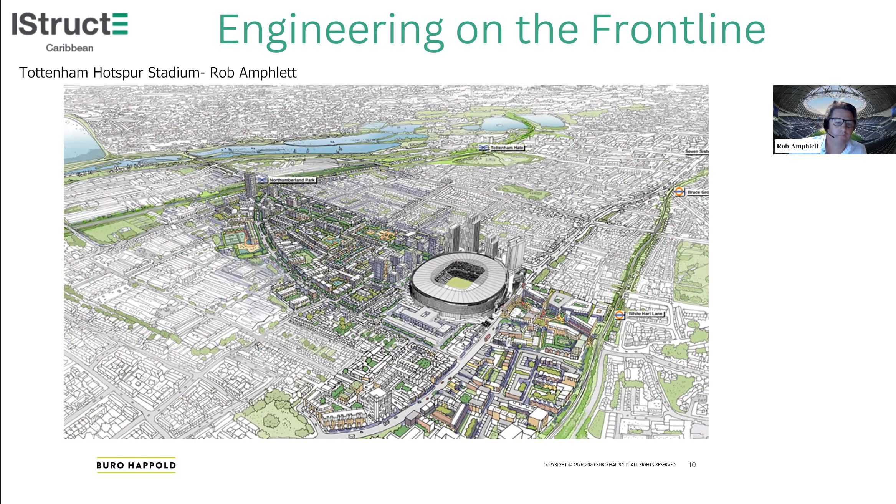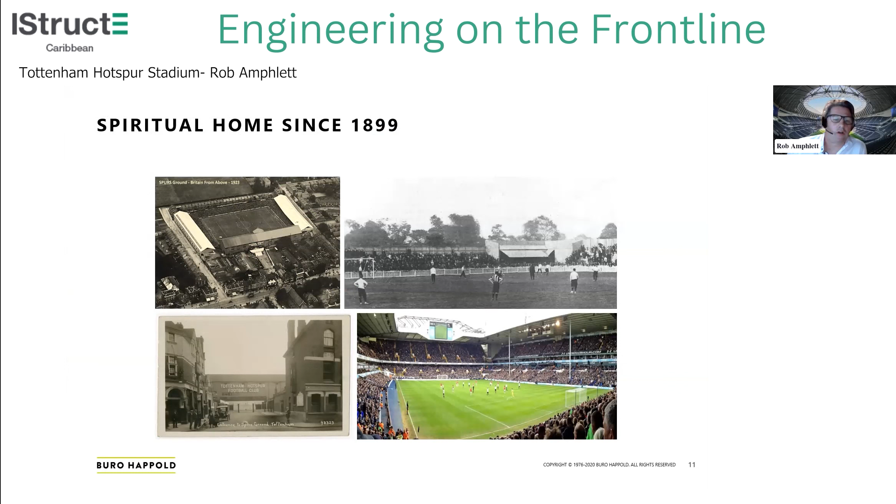So this area of Tottenham is known as White Hart Lane, and it's been the spiritual home for the club for over 100 years. This drove a really strong desire from the club to stay at White Hart Lane and to be away from home for as little time as possible. So what this meant is a key driver to the design was phasing. A strategy to keep the club playing at White Hart Lane for as long as possible. And what you've got on the screen now is the footprint of the old stadium in blue over the new one.

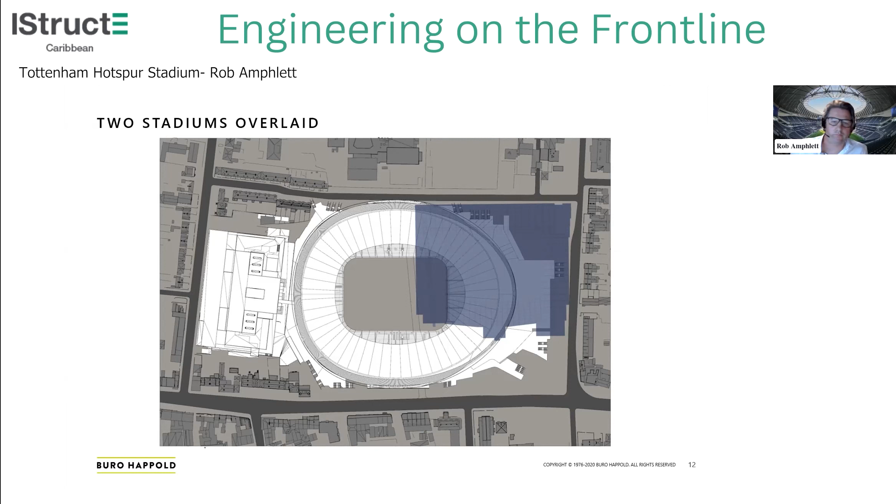And here you go, the comparison of size. So the number one there is the old White Hart Lane. Number two is the new Tottenham Stadium. And this is why we're doing it: increasing capacity, increasing revenue for the club. But also note how compact it is compared to Wembley.

So Wembley has 90,000 seats, and Tottenham 62,000. Okay, so there's more seats at Wembley, but look how much closer we are to the pitch.

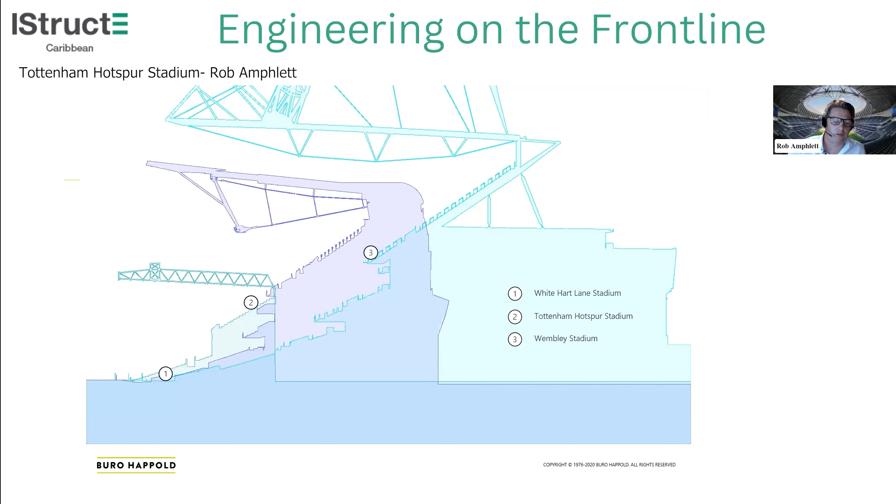And the stadium was fully operational. So we really did go for it on the phasing. This is one of the cores being built through the top corner of the old stadium. So desperate were the club and the fans to stay at White Hart Lane right to the bitter end.

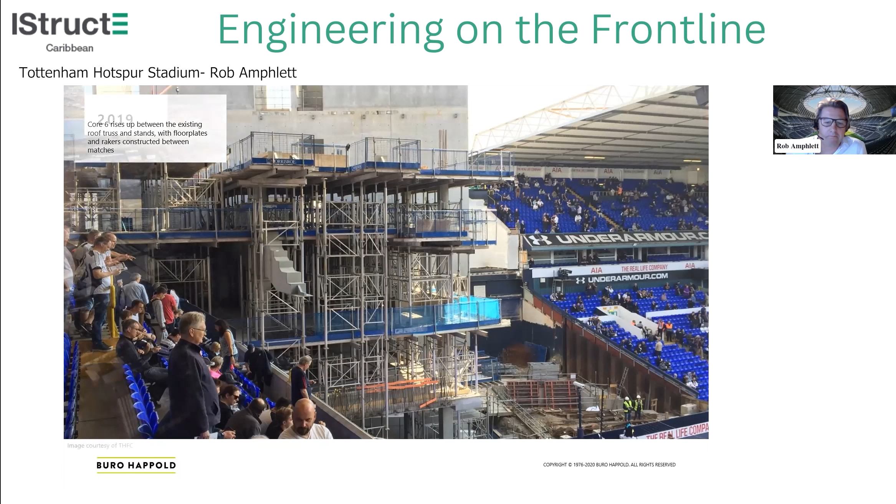But how do you get to Tottenham? There's a very dated transport infrastructure around Tottenham. For those of you in the room who don't know where Tottenham is, here you go. So London in the UK, North London, and they're the transport links that link into this area.

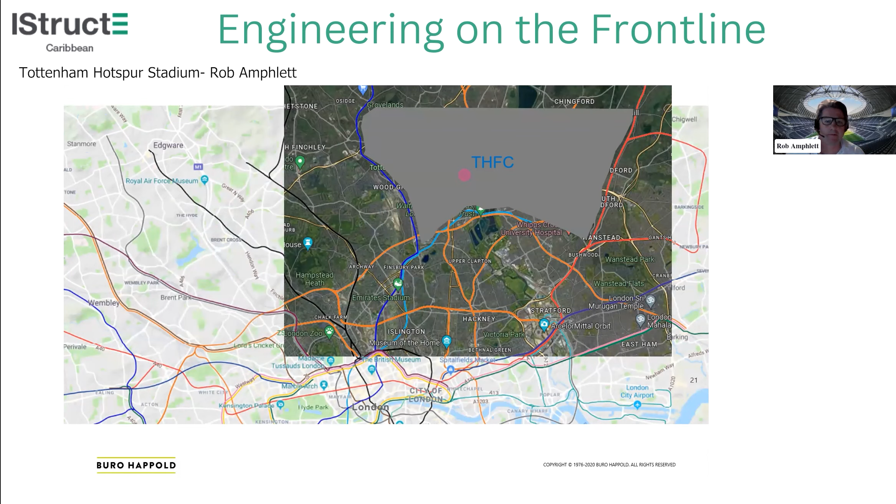And here it is in relation to the underground rail links. One of the key things is the stadium's in a bit of a transport shadow, so it's not easy to get to, and that's why it's one of the more deprived areas of London. And again, this drove some of the key drivers for the project.

Why should people come out to a new, bigger stadium? You saw how much bigger the new stadium was, and this was a key challenge for the whole project. And the answer from the club and the chairman Daniel Levy was simply, it just had to be the best. Build it and they will come. And that's hopefully what I'm going to show you.

So, having spent over 10 years of my life working on this project, I could talk about it for hours, but in the time we've got, I'm just going to focus on three key aspects, which will hopefully give you an insight into the design that we created and the value we can create as engineers.

If we just pause momentarily to consider what we mean by value. This presentation is based partly on a paper I wrote for the IStructE, which was about the value of engineering. So if we define value as benefits minus costs, and engineering has a lot to do with minimizing costs or minimizing material or minimizing carbon. If we can do that while we're helping to create benefits, we can see how as engineers we can create value.

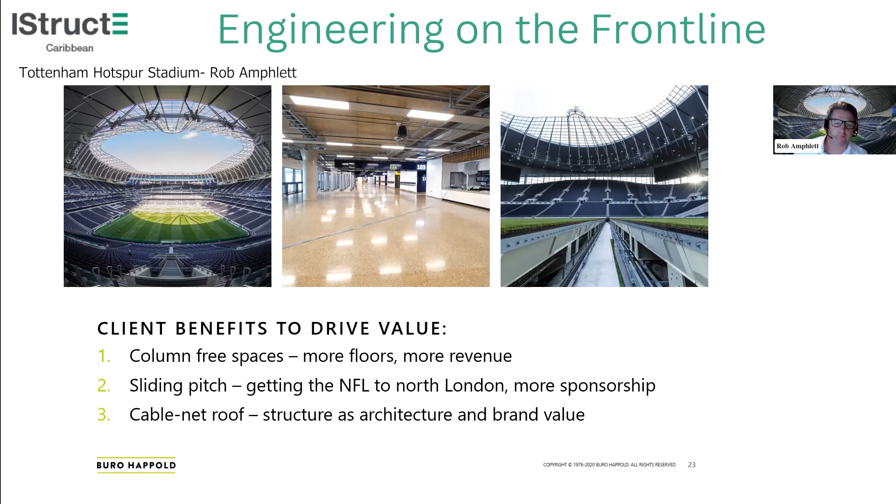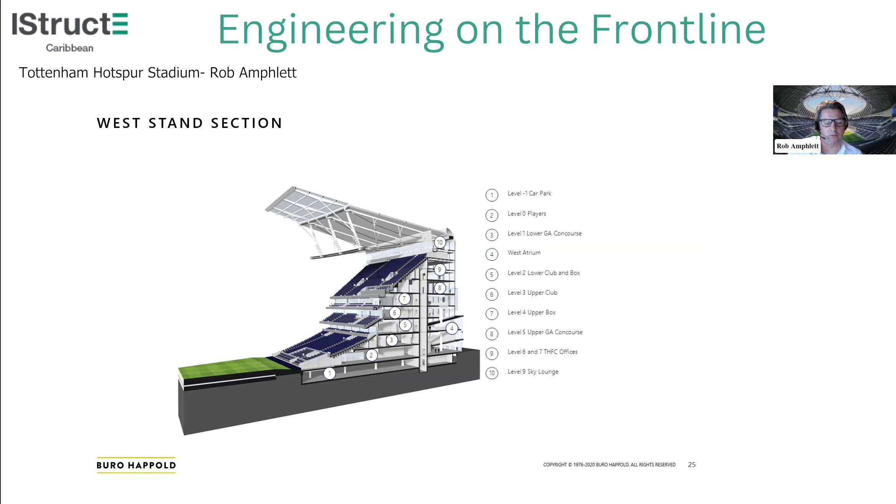And the key thing there was around quality. It's about making the spaces as good as they can be. The concourses drive the revenue. That's where people spend the money, and this was all about being the best.

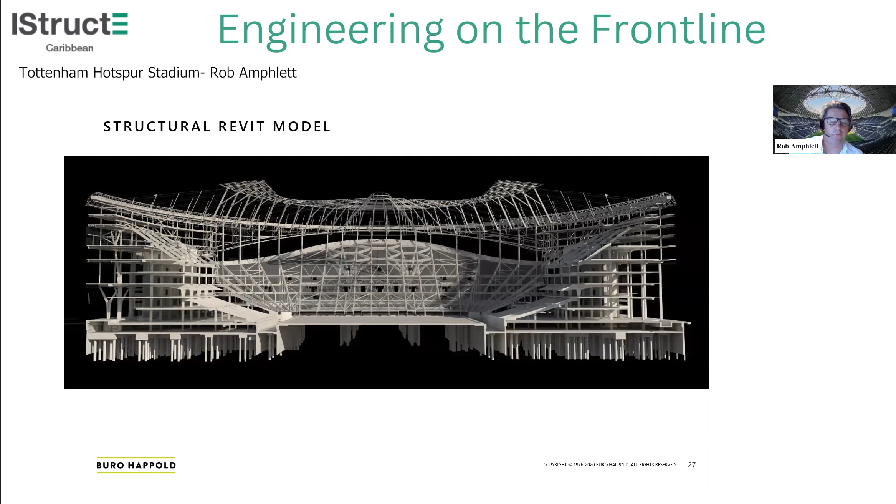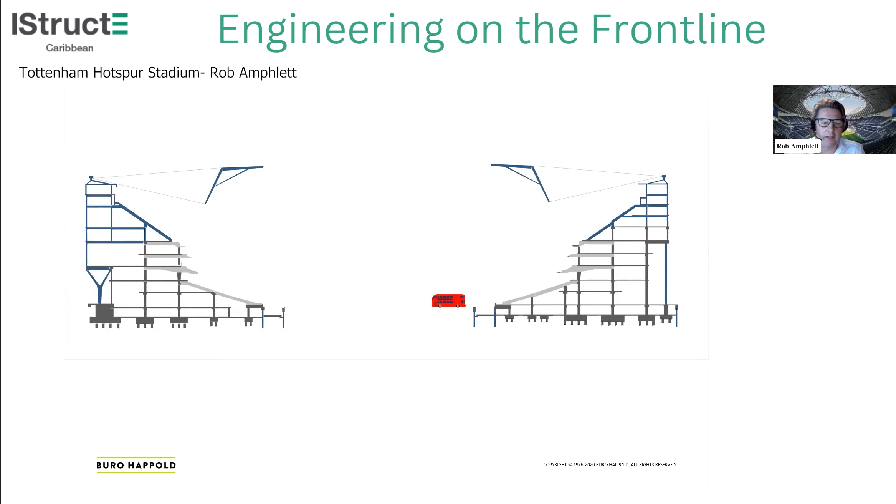And there's a London bus, just to give you some concept of scale. They don't actually drive the buses on the pitch. I'm not sure Daniel Levy would be very happy about that.

And here we are in plan. So to the south, and we'll come on to the south stand in a bit more detail in a bit, it was steel, and to the north, concrete generally. The dark grey long shapes there are the stability cores. So each stability core stabilizing independent parts of the concrete frame.

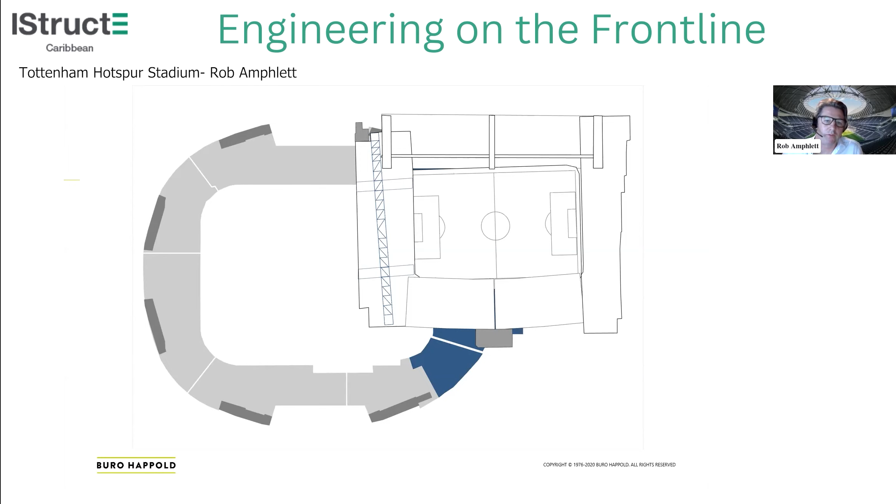And a key reason for this is because we were building around the old stadium. So in that second phase of build, doing it in steel obviously meant we could get it up quicker, or that was the theory. And you can see, you can't see one of the cores anymore. So that was the one that we were building in that corner. And that gave us the phasing line. So yeah, we're going to zoom into that red area in a second.

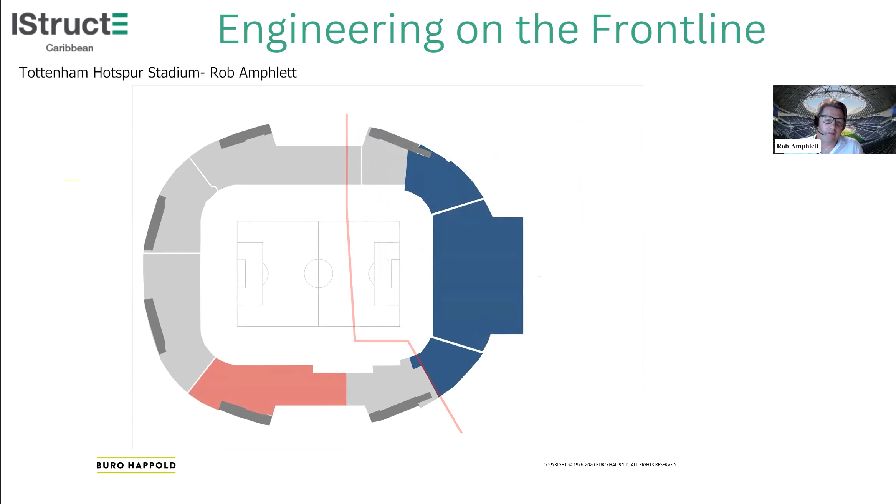But again, just another story from the chairman, Daniel Levy. So this is the training ground at Tottenham. In the restaurant in this facility, there's a column right in the middle of the restaurant, and Daniel absolutely hates it. So one of his key challenges was, I don't want any columns in the building, which obviously we couldn't do, but we did do our best to minimise it.

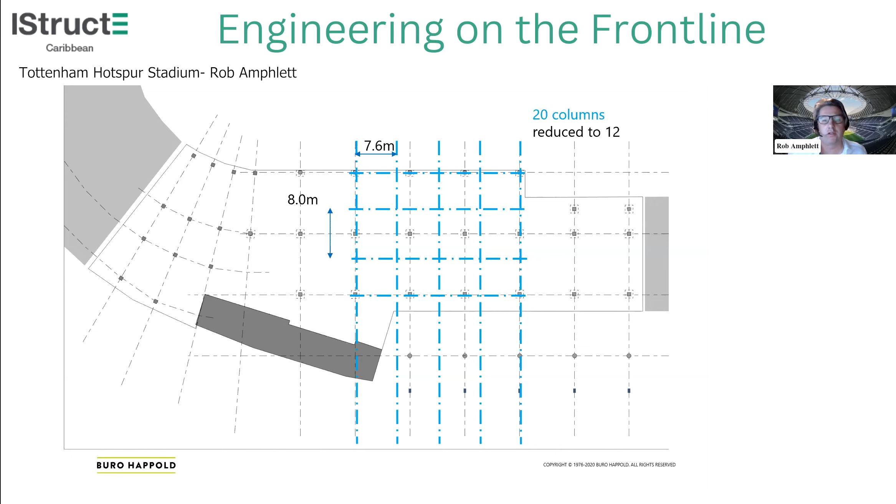So the blue is the original structural grid that we came up with. 7.6 by 8. 7.6 is pretty typical for a stadium. That fits with a normal box width. But here we wanted to push things further. So pushing it out to that wider grid, and we reduced from 20 columns to just 12 in that bay area. So pushing the grid to 10.1 crossways and 11.6 approximately the other way. What that 10.1 did as well meant that we could have bigger, more spacious boxes again, generating higher revenues.

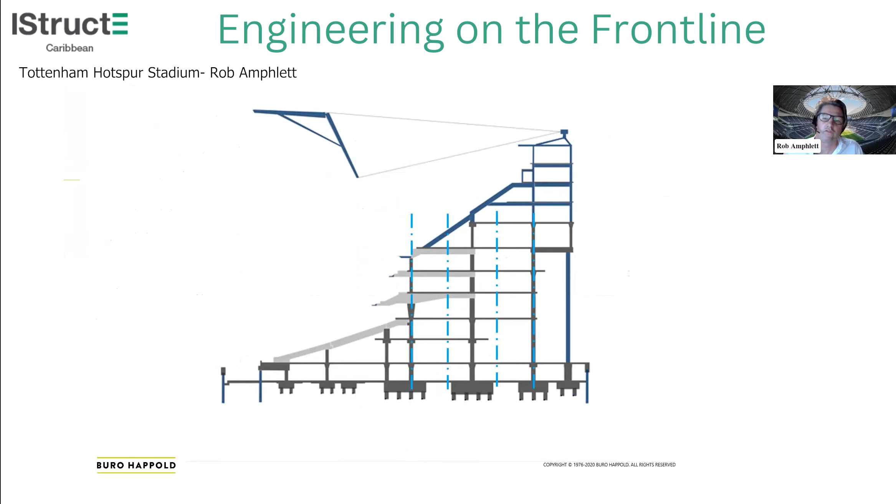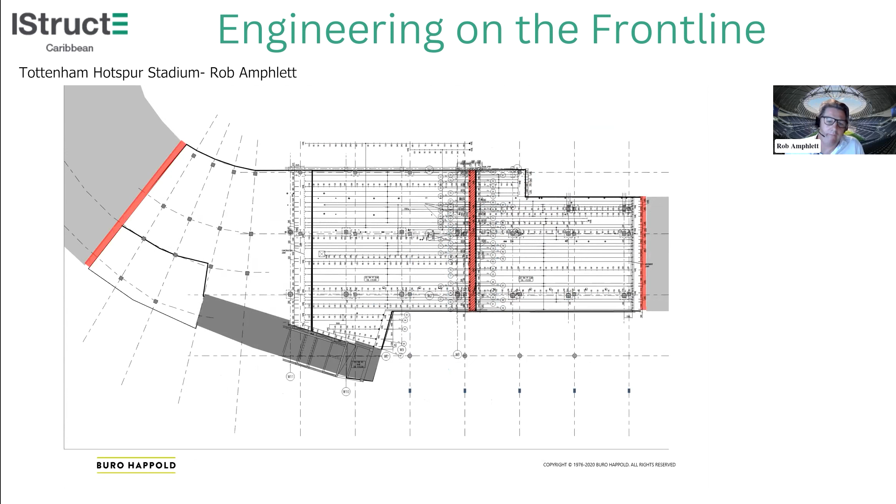I think in America they use unbonded more, and I'm assuming that might be what you use in the Caribbean, or maybe you don't use post tension at all because of the environment. And with thinner slabs, you get some dynamics issues as well. So a lot of dynamics that you have to deal with.

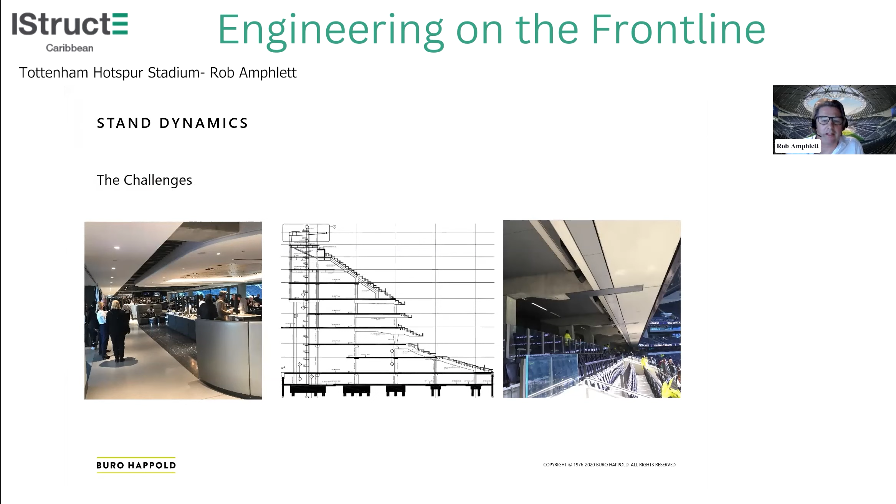But in a football stadium or a bowl structure stadium, the bigger issue is actually the seating bowl and the crowd dynamics. So again, trying to maximise the space for hospitality, we will push really hard on some of these cantilevers. Like I say, to maximise the spaces and minimise material. So this meant we had to come up with a completely bespoke approach to dynamics. It didn't work with just the standard guidance that we get for sports stadia. So we had to look at loading the tiers differently.

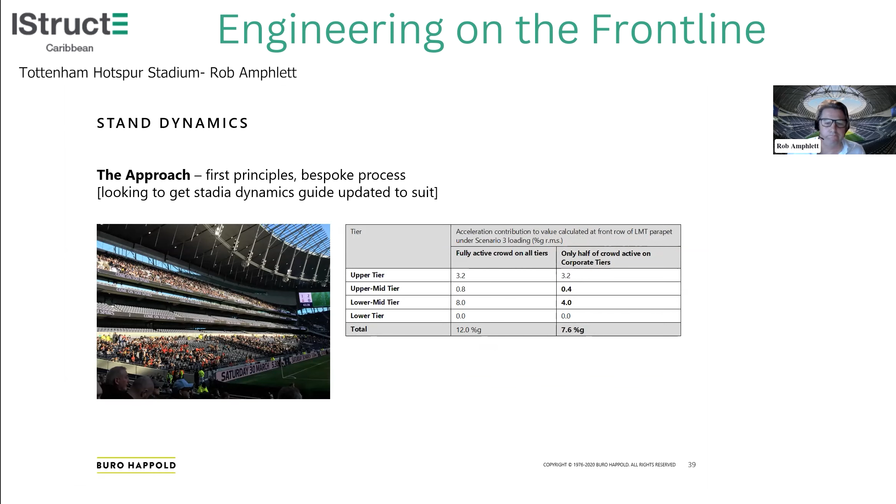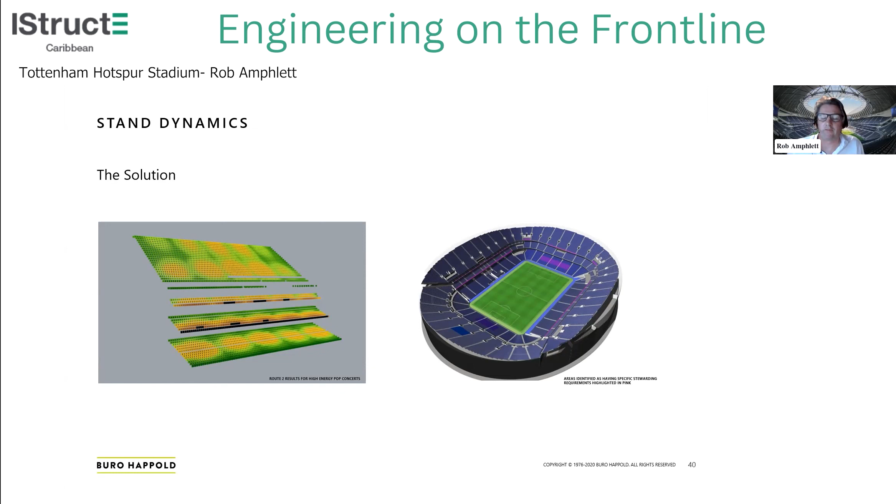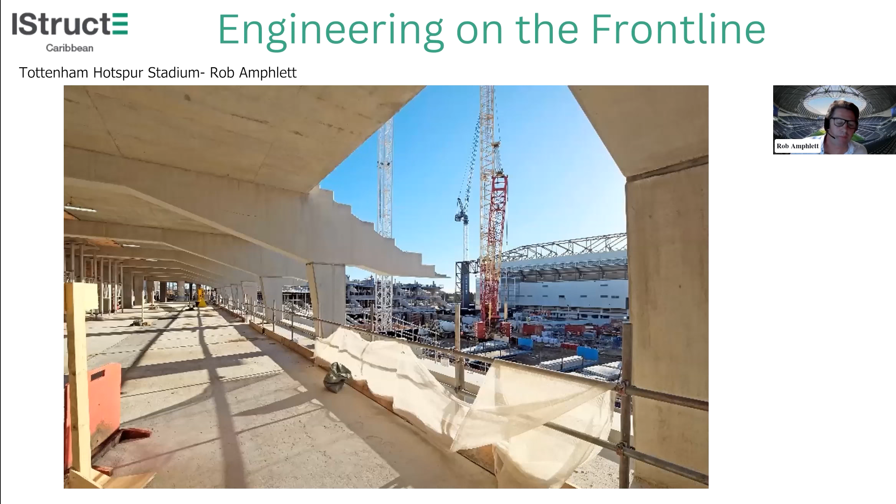So we did get our frame built and our cantilevers built and got them approved by building control, and the club did get their extra space. And we also managed to do a bit more to reduce our carbon, bearing in mind this was back in 2015 when we were digging this hole, and we weren't yet fully targeting embodied carbon.

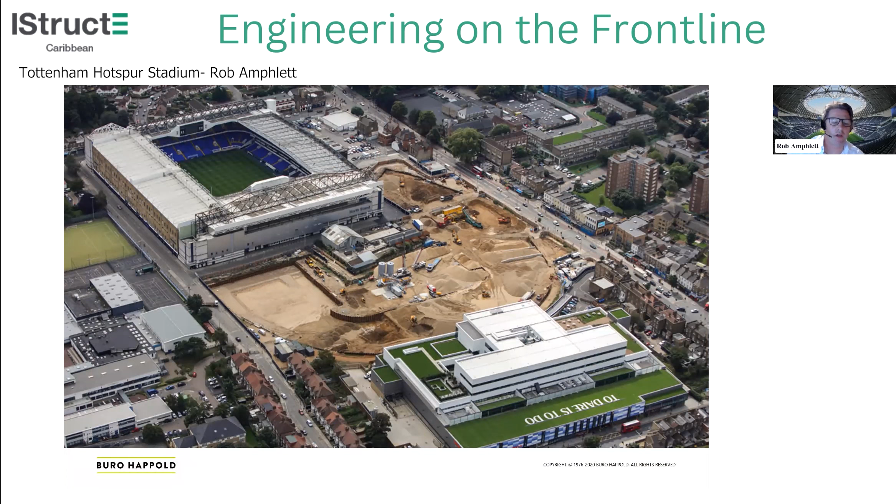So I can't take the credit for this, but my geotechnical team spotted this opportunity. What they noticed was, as we were excavating the material, that it looked ideal for making concrete. Oh, wrong way.

So that's what we did. We started sorting it and washing it, all that as dug material. Got some good grading out of it. We had to import a little bit to turn it into concrete. We had a batching plant on site, and through that we managed to save a lot of carbon, a lot of cost, and a lot of heavy truck movements.

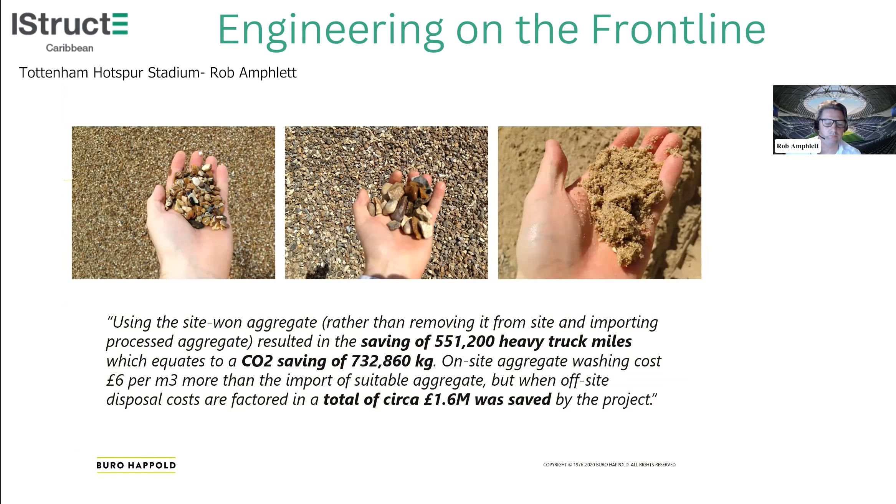polished. And what that did is it saved a lot of weight, because we then didn't have to put screeds in and finishes over the top. So it's much more robust. Some of the issues we get on our venue projects is screeds can crack up over time.

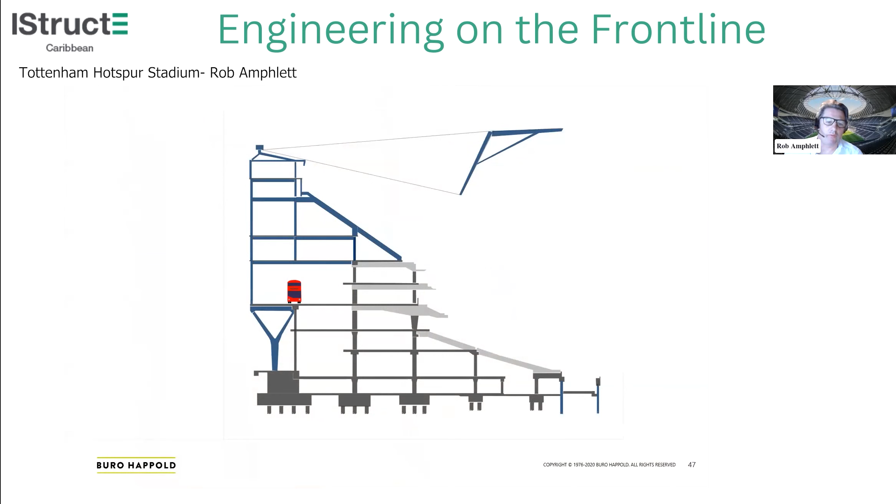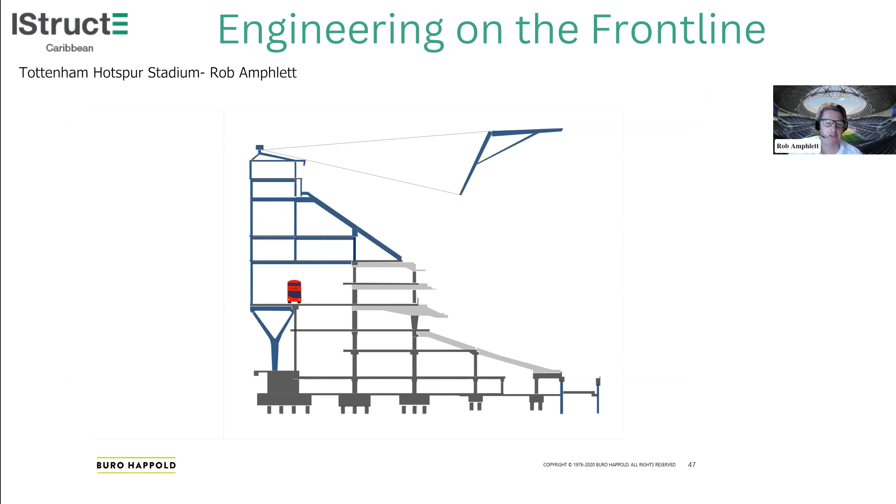We also created a column-free area in the east stand for banqueting and conferences on non-match days. So here again, the steel and concrete split, and our London bus has now driven up into the building, to give you some context of scale. And again, the benefit of our increased column grid with the post-tension slabs meant we only had to drop out 2 columns and transfer them out to get a sort of 24 by 30 meter space.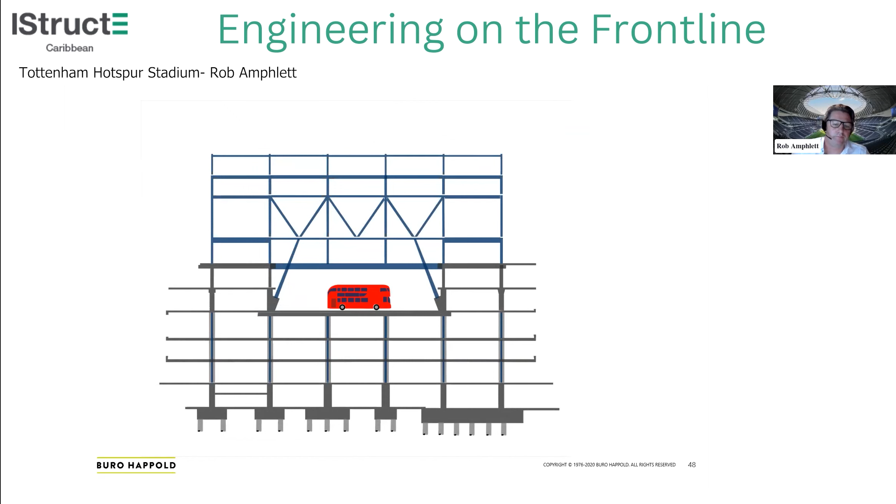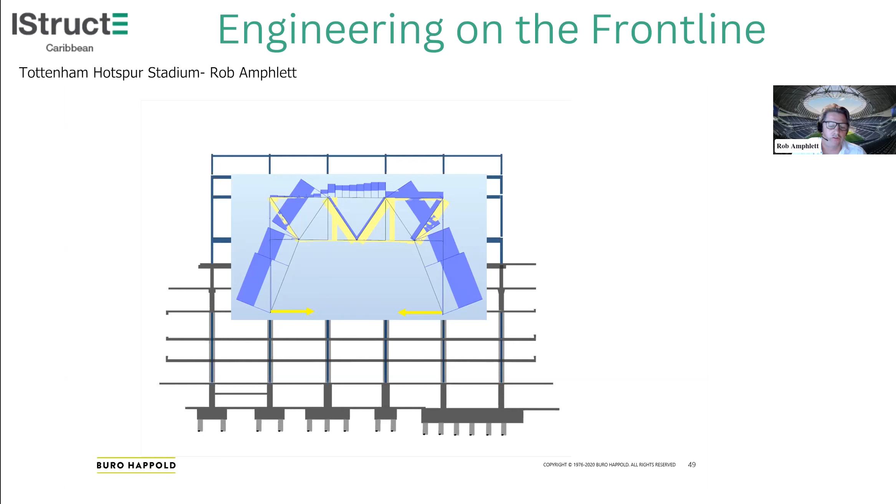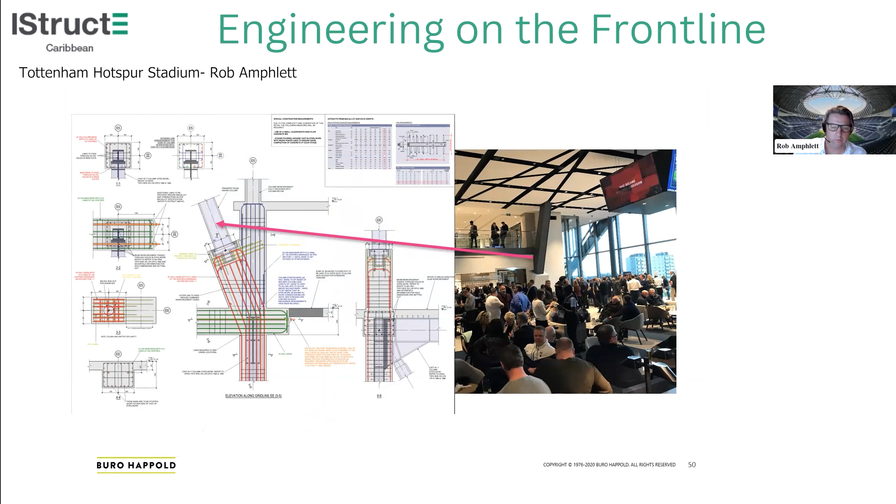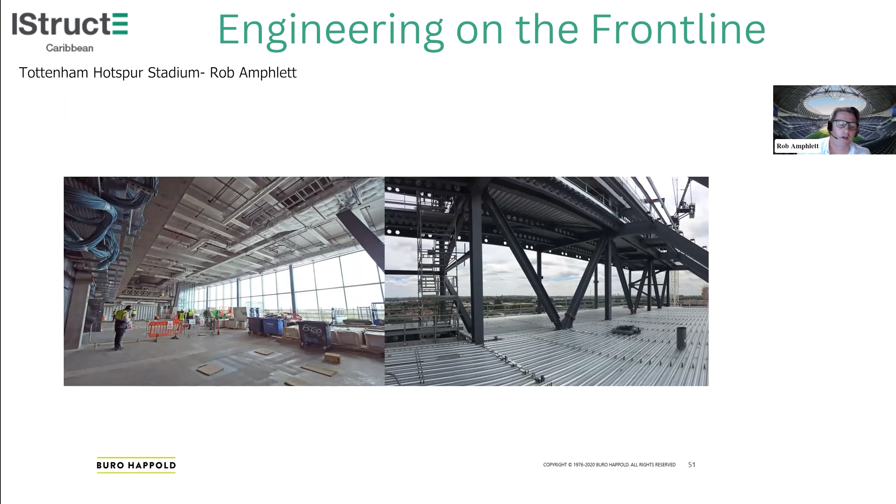And we achieved this with a transfer structure over 4 levels, so a combination of a kind of tied arch action and a transfer truss. We had to work through some pretty complex detailing to make everything work. As you can imagine, took quite a bit of time. But what it generated were these open spaces with that transfer truss buried in a plant area higher up. And what the club got was enhanced non-match day revenue and higher value.

So by taking on Daniel's no column challenge, we didn't quite eliminate all the columns, as you can see, but we did reduce them by about 40% and help drive real value into the project.

So I'm not quite sure how we're doing for time, but hopefully we're not too bad.

So next up, the sliding pitch. So this is the second of these client benefits I'm going to talk to you about, and this was about the sliding pitch helping to bring the NFL to North London. So an ambition of the chairman Daniel Levy was always to try and entice the NFL to come to Tottenham. There's a whole load of reasons behind this. Part of that is multifunctional use of the stadium. Obviously, the more times you use it, the better it is for everybody. But also the kudos and the enhanced sponsorship that would generate, and the world attention.

So this was Daniel's vision. He wanted to be able to play an English Premier League match and an NFL match in the same day. So this kind of drove the whole performance around how we made this transformation work. A key point to note that the starting point for any venue project is about the field of play and the sightlines. And a key challenge around having a multi-use stadium for football and for NFL is that they have very different requirements on sightlines.

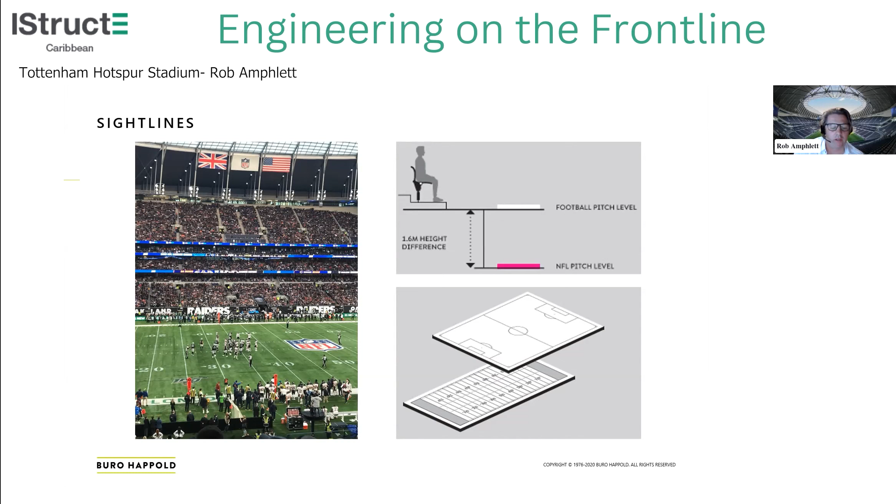So this was the architect's idea. Let's put it all on hydraulics and raise it up and down. Obviously very expensive and very technically complex.

So being good engineers and trying to do for $1 what anyone would do for $2, we looked for what had been done elsewhere. So this is the Arizona Stadium. It's an NFL stadium in the US, and here they slide their pitch out. Now here they do it to bring it outside because it's a covered stadium with a retractable roof, but they bring it outside to grow the grass in the parking lot.

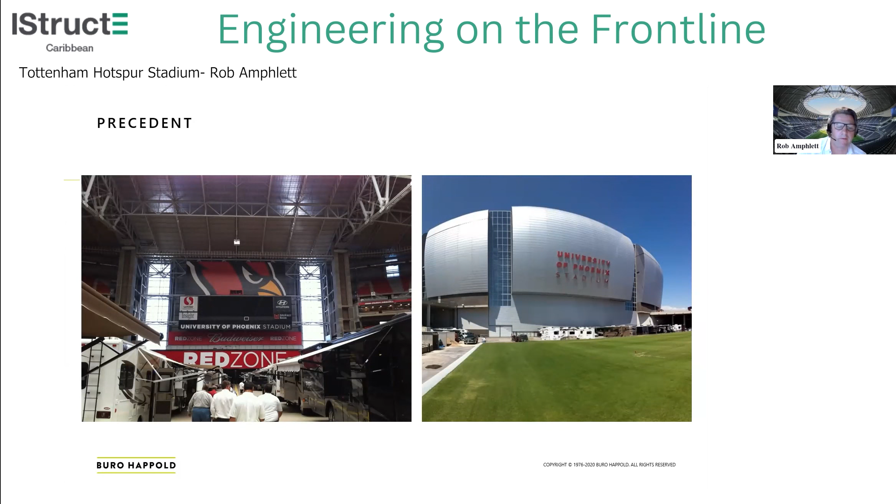And that really led us to this solution. So, two pitches, an NFL one and a football pitch that gets slid out of the stadium. Sliding the pitch is relatively low tech actually, and an order of magnitude less cost than that hydraulic system.

But that did then present us with another problem: how to get that grass pitch out under 17,500 people in the south stand. That was a 90 meter span, and we talked about dynamics already. A 90-meter span with that many people jumping up and down, it just didn't work. But Daniel doesn't like no, and wouldn't accept the answer, so he sent us away to think again.

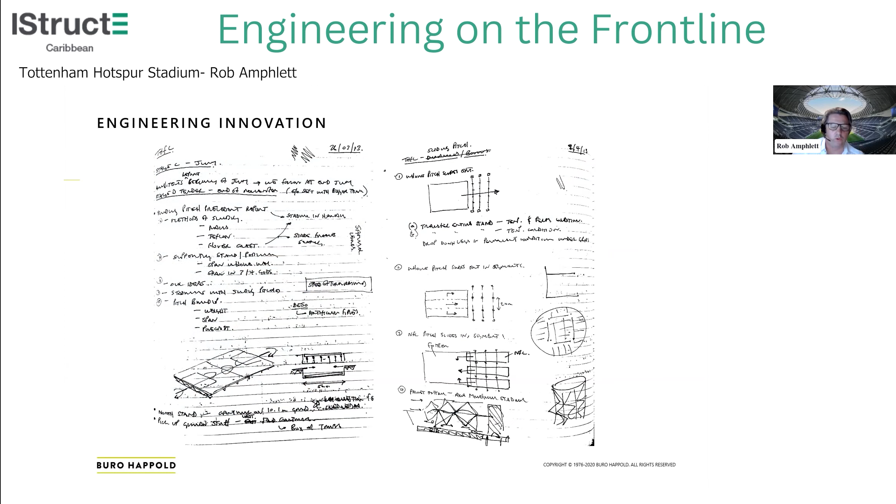And the innovation that we came up with was to split the pitch in three. This was relatively simple, gave us a couple of lines of extra support and got over the dynamics problem. But this had never been done before. So in splitting the pitch, like I say, we get extra lines of support. Lots of transfer structures required, and again, an even more bespoke approach to the dynamics.

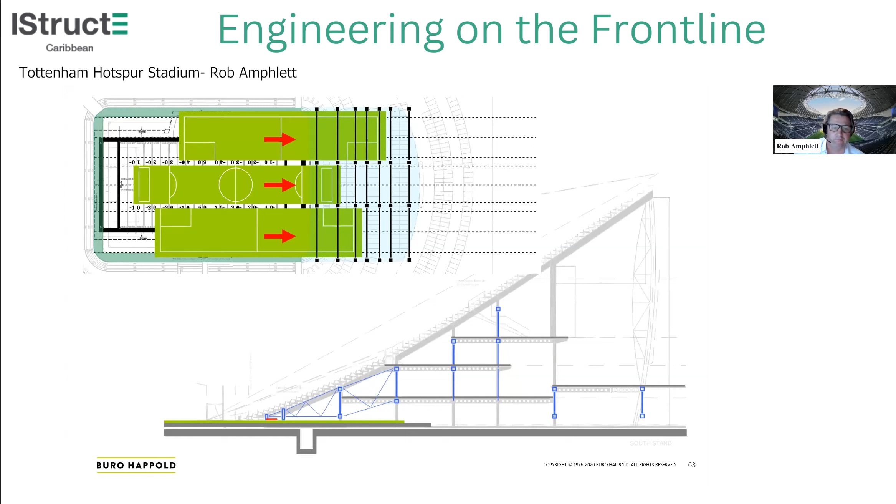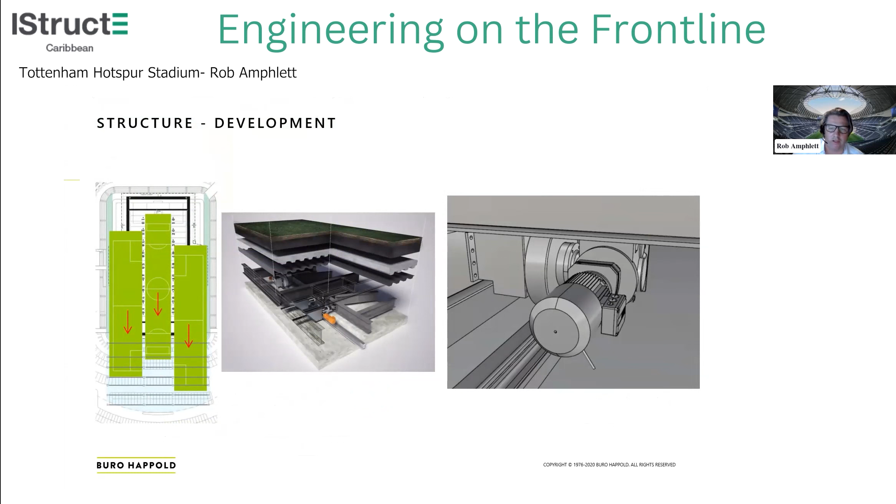And again, splitting the pitch did add a level of complication. It was more complex. So we spent nearly two years doing both computer prototyping and prototyping out at the training ground. Key aspect of this was how the grass pitch joins together. Obviously, you've got very expensive football players running around on the pitch. You don't want them breaking an ankle.

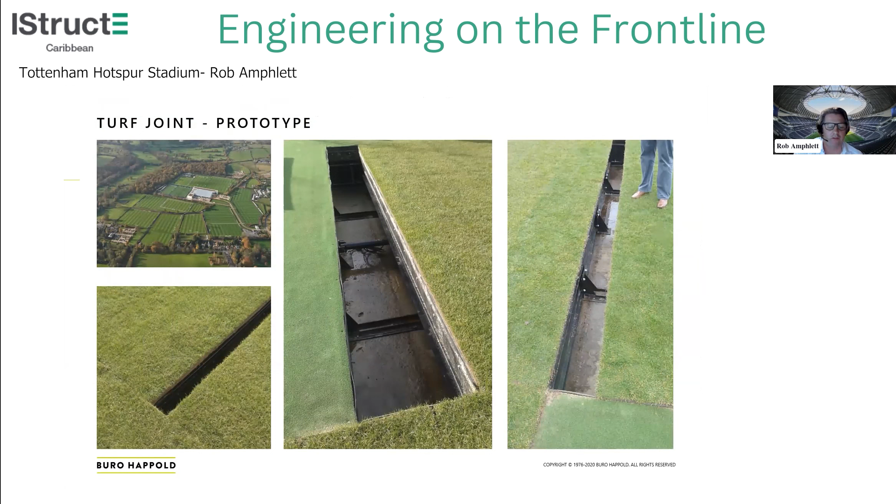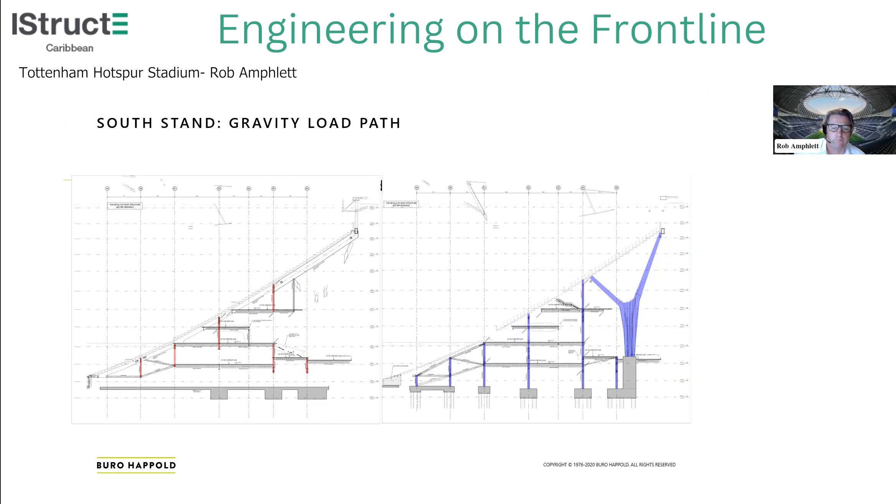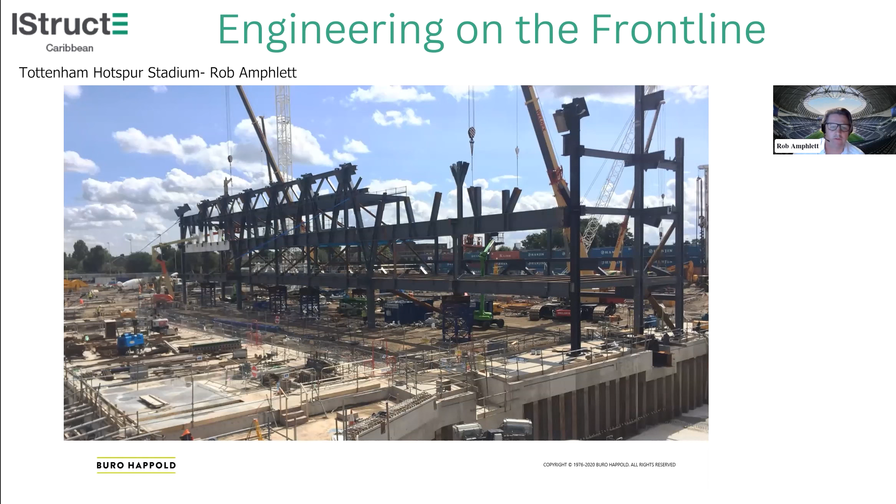And this is the final solution. So on the left there, the red lines picking out the transfer trusses, and then two large structural trees at the back. With the transfer structures, it also made it quicker to install on site. So bigger lumps of steel that we could bring in.

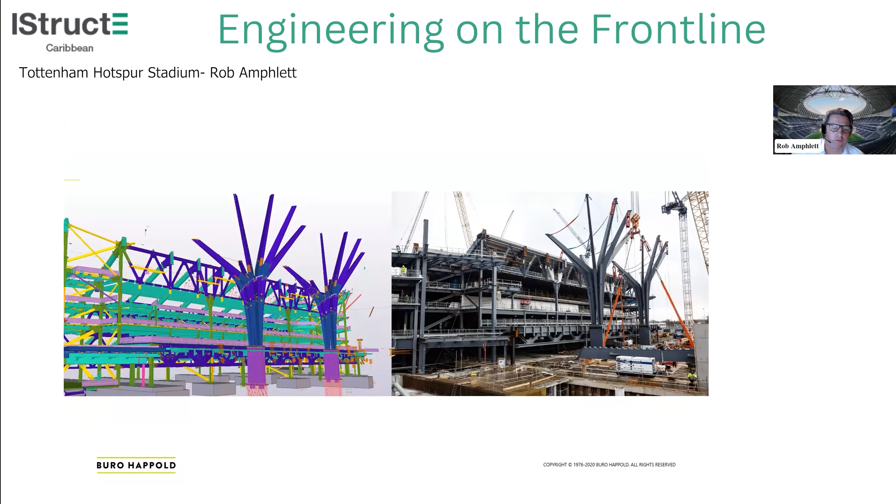Huge amount of complex engineering. Like I say, in the time we've got, we can't really go into the detail there, but lots of modelling, lots of working with the steelwork fabricators, Severfield. Obviously, complex construction sequence, tying things together, but it really has become a key feature of the South Stand.

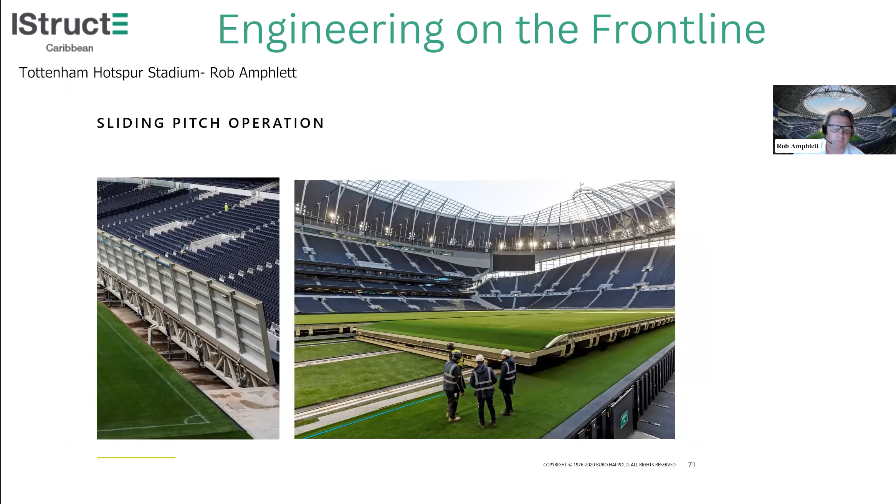Splitting of the pitch also required a lot of automation around the edge of the pitch. And also we had to work out how to keep the grass alive when it was under that South Stand, so no sunlight. So there's a whole network of specialist lighting. Also have to water the pitch. Groundsmen for football pitches get very twitchy about mowing their grass. They need to mow at least every other day. So huge challenges there as well.

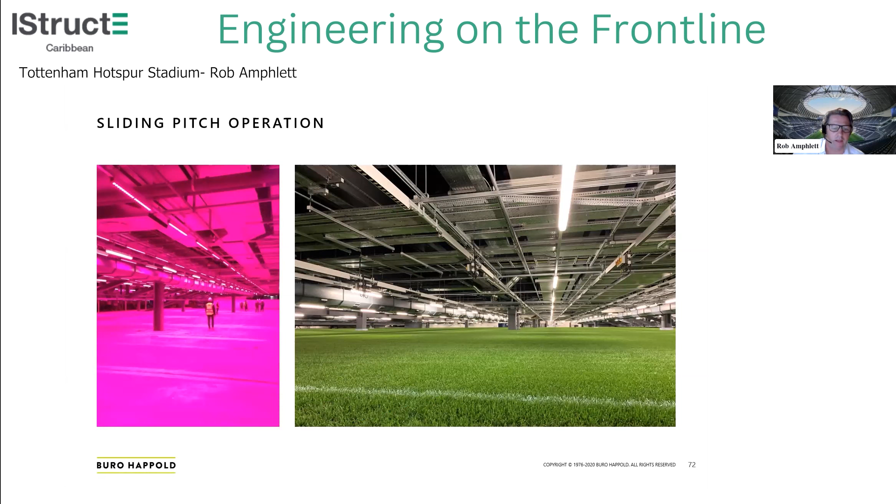So while all these measures did add cost and complications, ultimately that was offset by the commercial benefits that I talked about at the start. So again, the engineering innovation that we brought turned Daniel's NFL dream into a reality. He got his deal, and again, the engineering really helped to create value for the client.

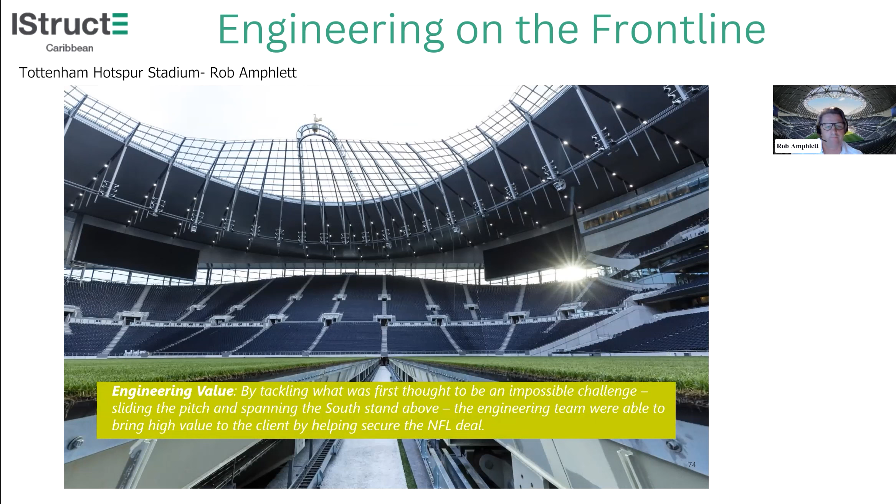So on to the third of our client benefits. So the cable net roof. So again, the tree structures in the South Stand and other aspects of the stadium, structure really became the architecture. Again, looking at making this the best it can be so that people would come.

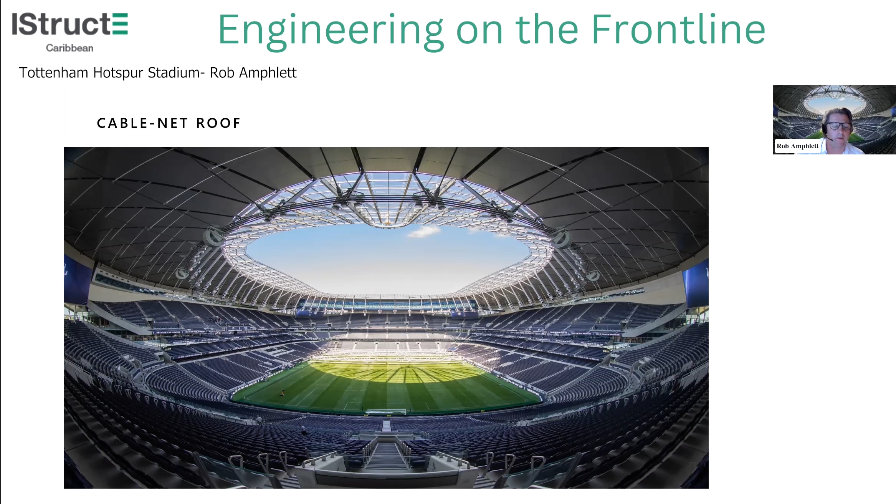So like I say, the trees were structure as architecture, but really the cable net roof has become almost the branding enhancing part of the project, as hopefully you saw from that video at the start as I panned round. It's a key element of the stadium, a key part of the experience of sitting in that seating bowl. But how did we get to this point?

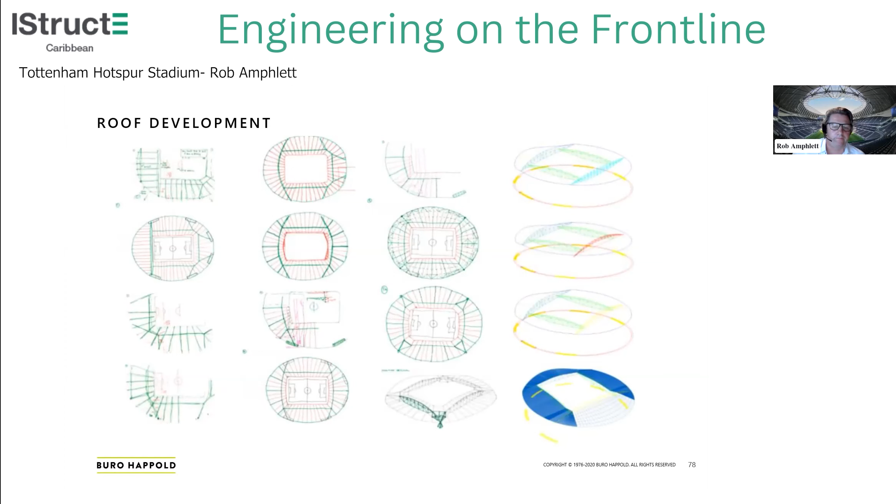So as ever, we start with fat pens and scribbling out designs. The roof of a stadium is arguably the key structural element that we designed. So again, this was a bit of a legacy from the 2010 planning application, where we had a bending truss solution, and these were some of the options we were looking at of converting that into the new shape of the roof. So we spent a long time on that bending truss roof. We refined it, presented it back to Daniel, and we had a problem.

One of the key innovations that the architect Populous brought was hospitality spaces at the back of the upper bowl. These are usually quite utilitarian spaces, so it was a bit of a stroke of genius to turn these into high revenue prime hospitality spaces. But this was the problem. If you've got hospitality spaces right at the back of the upper bowl, you're looking straight into the roof. And when we showed Daniel some of these pictures, he wasn't happy. It looked too messy.

So the engineering innovation that we brought was to go with a cable net roof, which is the picture on the right.

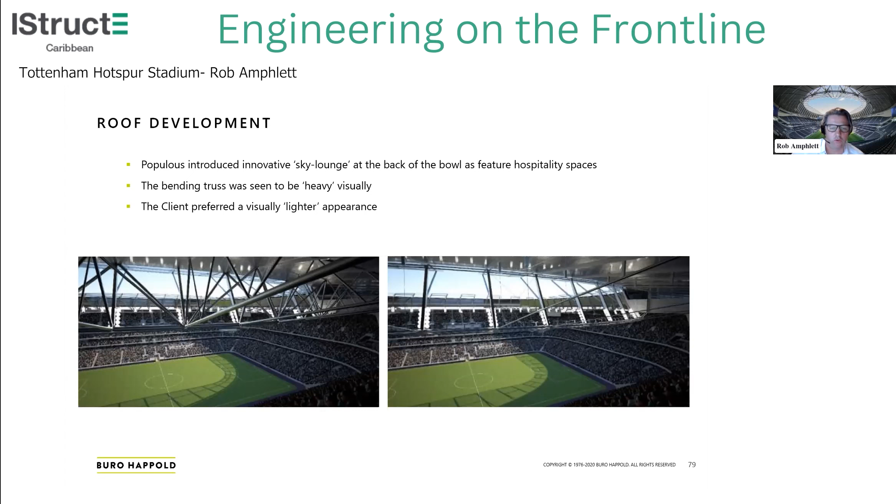So cable nets usually become effective around over 45 meters. Obviously, there's a lot of variation that can happen in there. And by the way, those costs on the left are a bit out of date now with the cost of living crisis and everything else. Oh, clicked on.

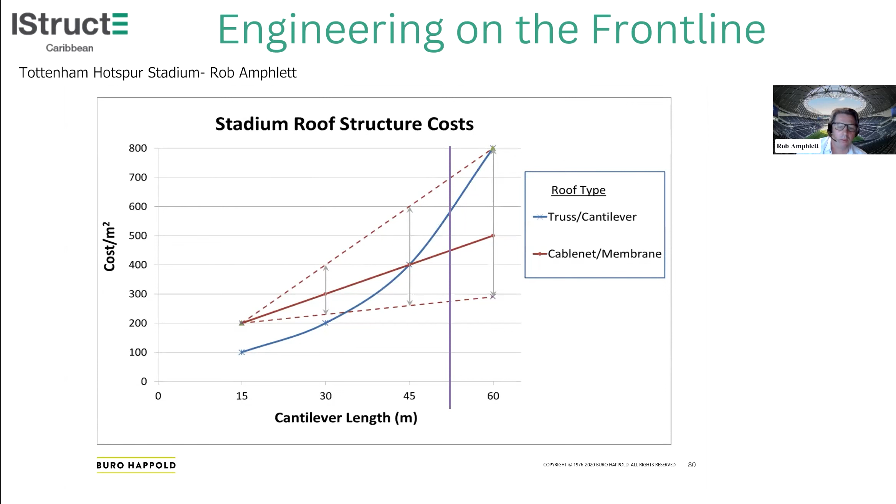So for those of you not familiar with how cable net roofs work, it's a bit like a bicycle wheel. You take a bicycle wheel, you scale it up by 285 times, you put a hole in the middle, and then you fit the shape around the structure that you've got below, or we did in this case. All that manipulation is highly complex. It not being circular obviously adds a whole load of complication. Extensive nonlinear analysis. We could do a whole talk just on this.

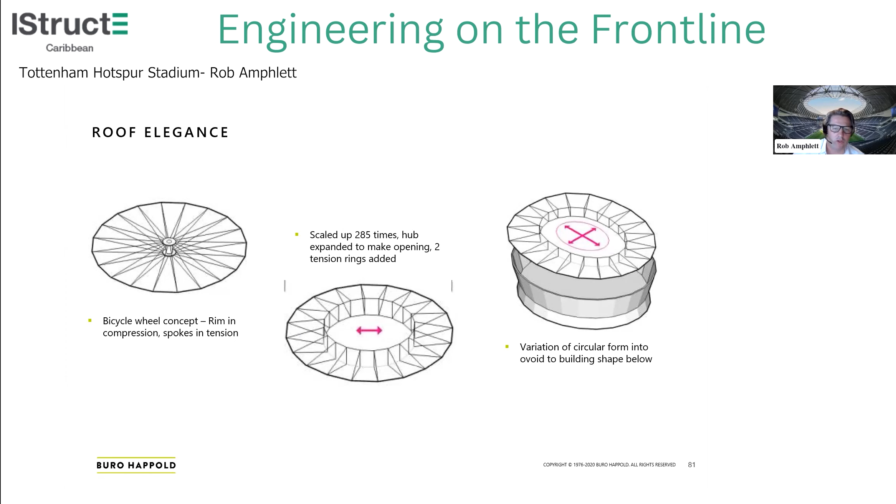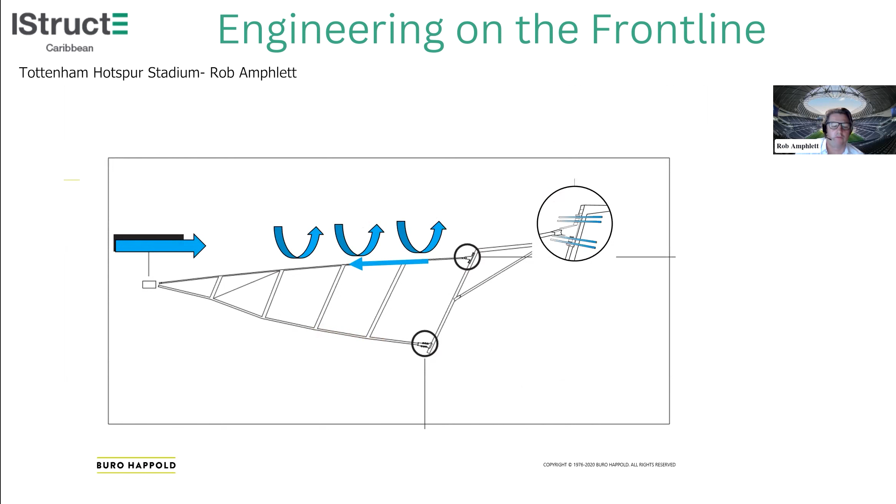But the basic principles of a bicycle wheel still hold. On the left there, you see the rim, which is a compression ring that resolves all those internal tensions. The wheel hub is formed by two tension rings, those things circled in the center there, and they are held apart by rigid steel. Then you've got lower radial cables, which resist all the gravity loads, so it's slightly larger, as is the lower tension ring. And then the upper radials or spokes resist all the net wind uplifts. And that's the final roof geometry.

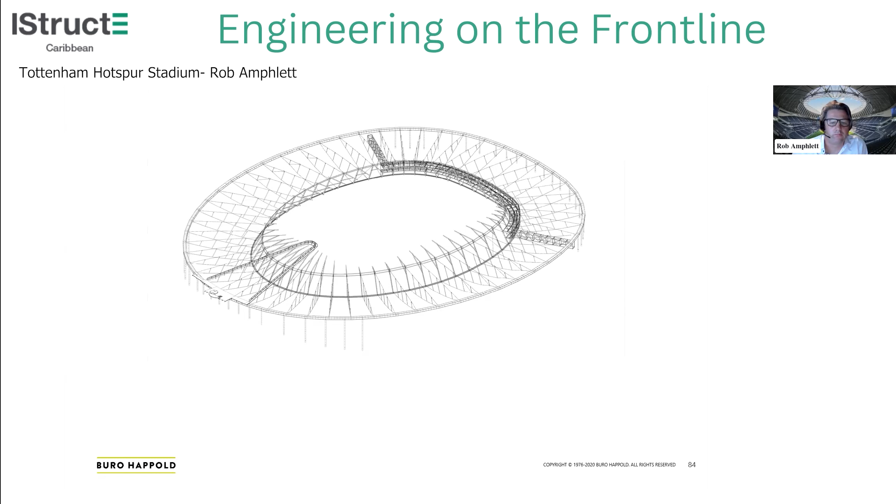The inherent benefit of tension structures is that tension members don't buckle. Therefore, they can be lighter and more efficient. And given that 60% of what a long span roof is doing is just holding itself up, this obviously has a big advantage. So then we take a bicycle wheel and we clad it and integrate it into the overall structure, and there you have your roof.

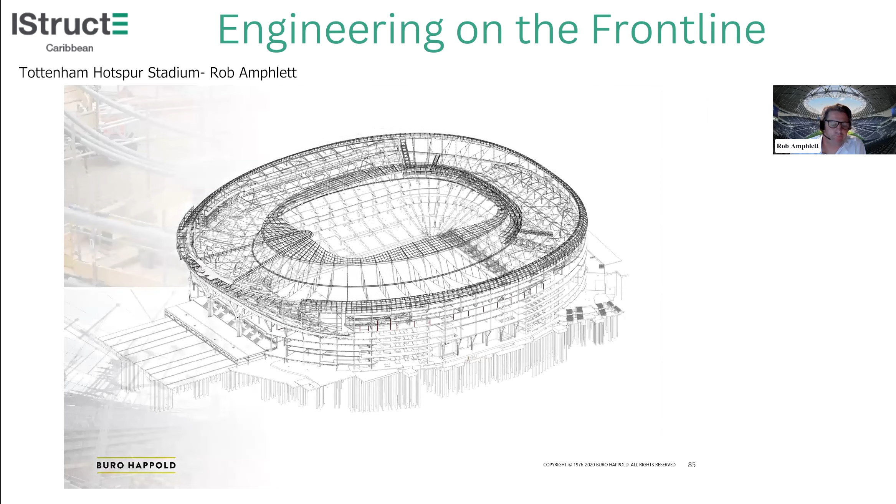The one drawback that you do have with cable net structures is in the construction. The erection sequence has to happen in a very prescriptive way. In particular, you need the perimeter compression ring there before you can start lifting the cables. As you saw in our phasing, we had to get the south stand in, that big steel structure, which supported that compression ring. So that was one of the key milestones and drivers for the whole construction sequence, getting the compression ring complete so we could lift the cable net roof into place.

When you get to that point and start lifting it, it only takes a few days really, but it's done in stages, so a couple of weeks, and the roof goes from the ground to fully lifted. One of the advantages that gives you is that you don't need lots of falsework. At the Emirates Stadium, where we had a bending structure, there were lots of temporary towers, etc. So cable nets are very efficient in terms of being able to lift them and jack them into place.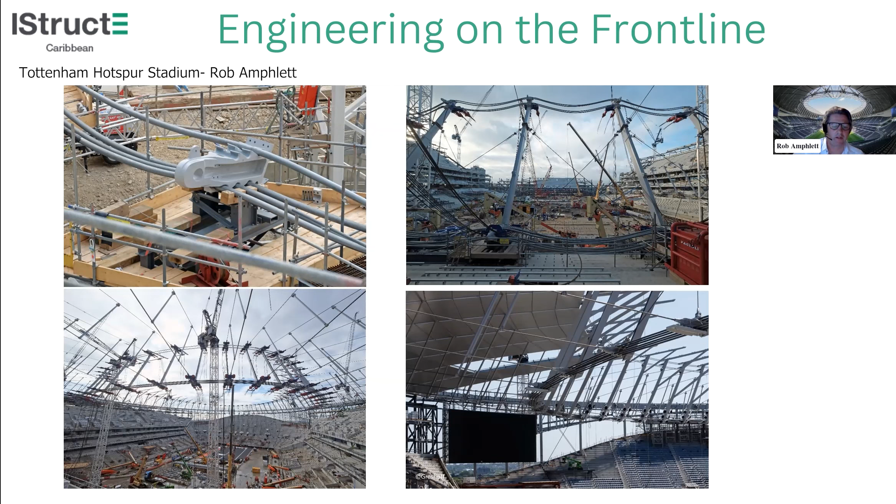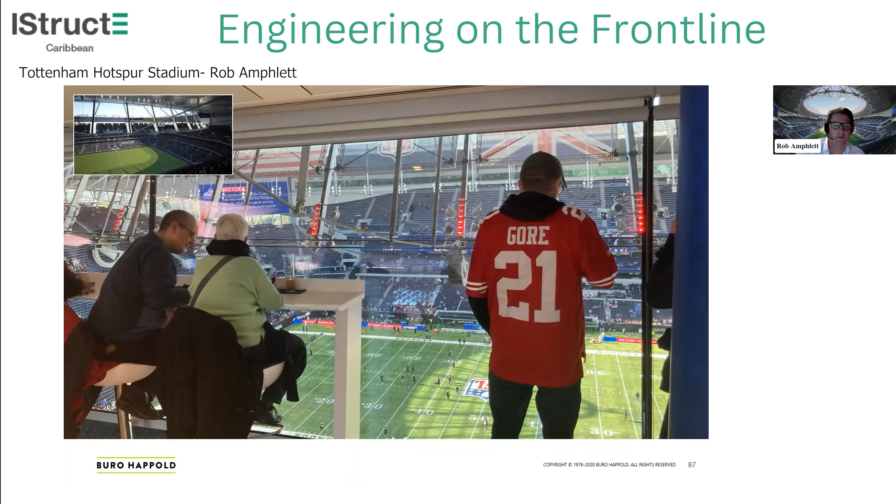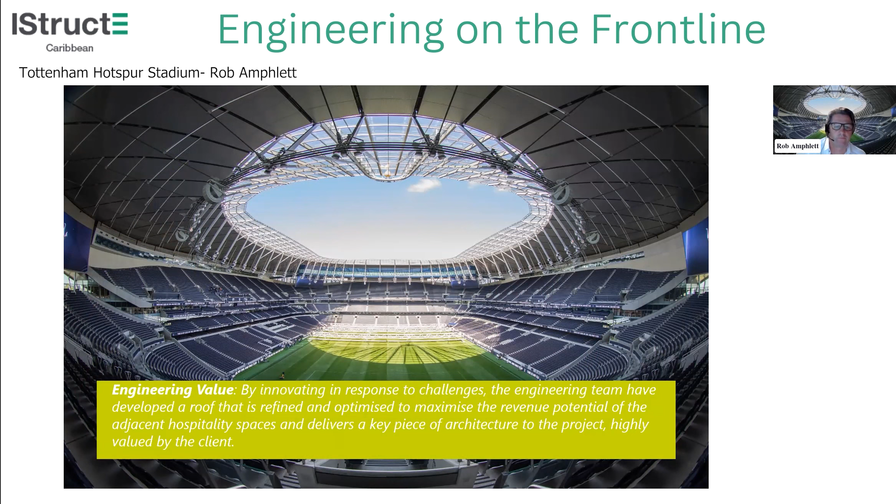So Daniel got what he wanted. This is the enhanced view from that hospitality space at the back of the upper bowl, and we got a highly elegant roof on our stadium. The value here is obviously multiple, but I think the roof really does provide that dominant architecture for the inside of the stadium. So that's it in terms of the detail on Tottenham.

I have to finish with a few acknowledgements. As with all of our very complex projects, it's a massive collaboration of lots of firms. In particular, the club, Tottenham, and particularly Daniel Levy really drove the vision for this all the way through the project. The architects Populous, obviously highly involved in the vision, and Schlaich Bergermann Partner for the detailed design of the cable net and the PT frame design, and then Severfield on the steel, and Morrisroe on the concrete, who we worked very closely with on site.

As I said at the start, we won the Supreme Award and actually the Long Span Award at the 2019 awards evening. So I'm very proud of the engineering we did. Like I said, if you want more detail, I did write a paper, and there is a bit more of a technical talk on the IStructE website as well, so you can go and have a look at those.

And the stadium has won wider acclaim. NFL mode in particular has been very successful. The Raiders quarterback Derek Carr even labelled this the best stadium he's ever seen when he played in the first match there back in 2019. Praise indeed from an American, given the wealth of NFL stadiums they have in the US. So I'm immensely proud of my personal contributions to this. Like I say, it has been my Everest project, and I'm really proud of what the BH team achieved with this amazing stadium.

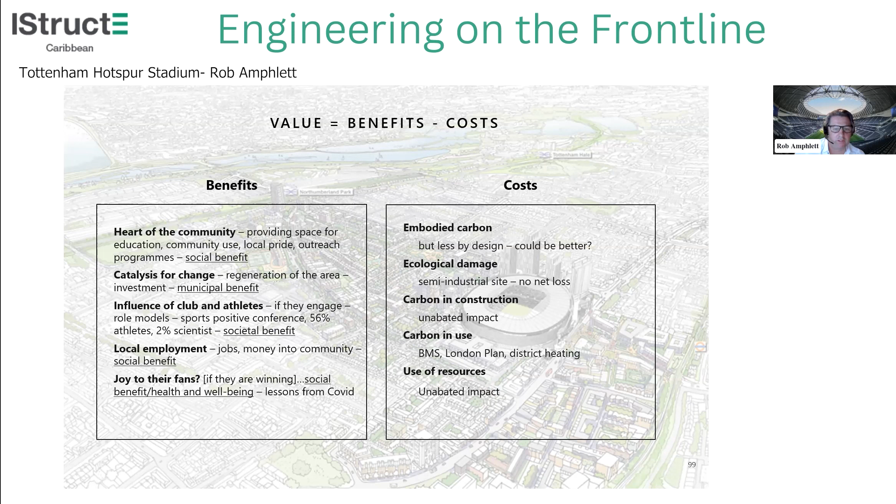Nearly finished. So the football clubs. This is what Tottenham are trying to do, looking at community and sustainability. I'm a little bit dubious of sports clubs around this area, and I don't want to endorse greenwashing. But I think these are genuine attempts to do better, engender better attitudes, and they do have an influence on their fan base. So I think for that they should be commended.

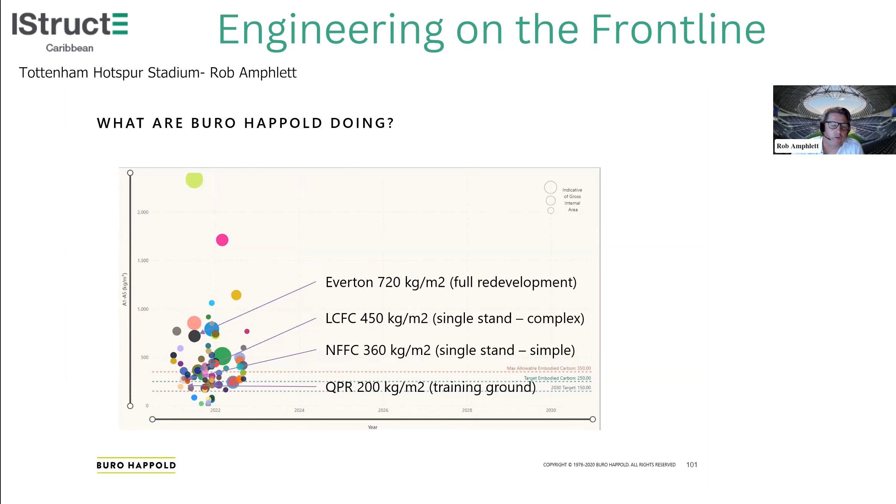And as a sector, as I said, and a profession, I think we have to question ourselves and strive for efficiency. Make sure that we push for rationale over whimsical decision making. As Buro Happold, we are setting ourselves targets and measuring what we do. I think we've got a long way to go, but we do have a route map for improvement, and we're investing a lot in technologies and bringing these together to implement onto our projects, to be more efficient, and as I say, try and do for $1 what any fool can do for $2.